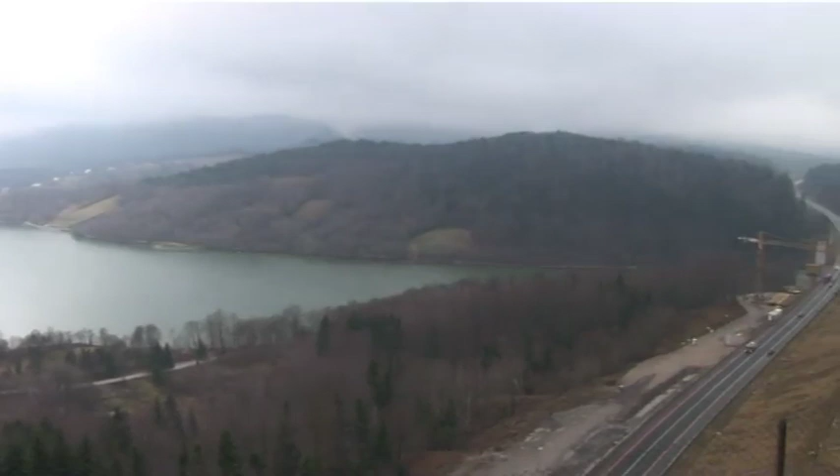Today, one of the main preconditions for the development of any country and its economy are fast, modern roads ensuring swift and safe transport of both people and thousands of tons of goods.

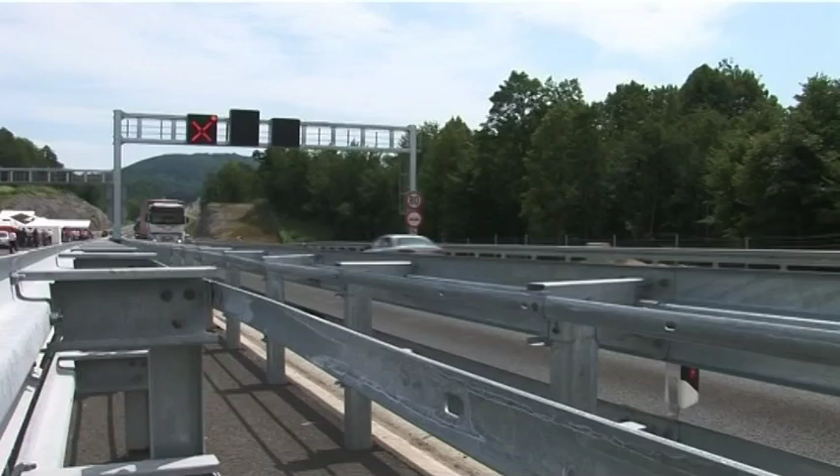Motorways have enabled the movement of people from continent to continent, serving to bring closer together different peoples and cultures, transforming journeys into occasional global migrations to desired tourist destinations.

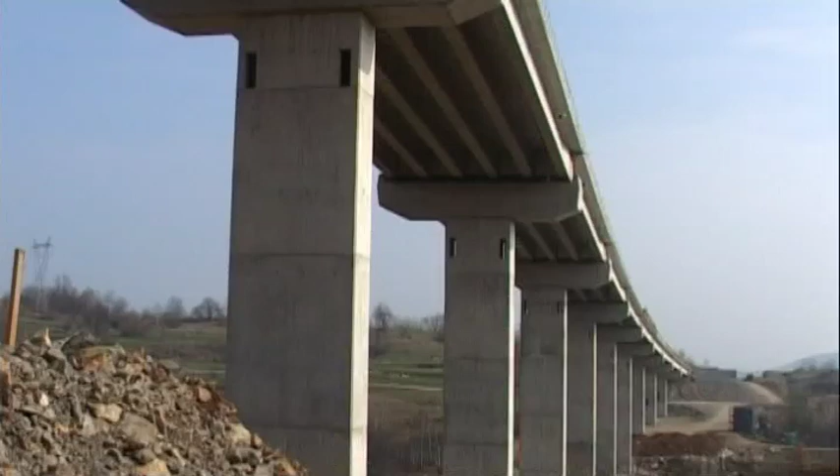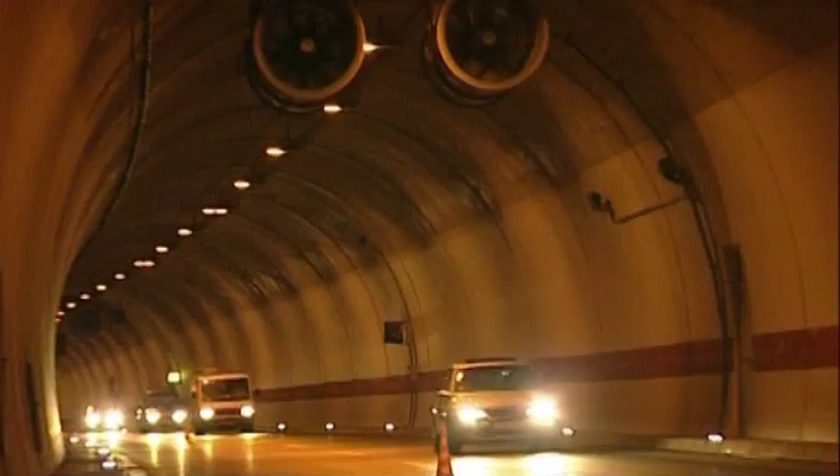Rushing towards our destinations through tunnels, across bridges and viaducts, we rarely consider the enormous efforts and knowledge the builders had to invest in order to build such structures. Crossing rivers and canyons, negotiating mountains have always posed a special challenge to road builders.

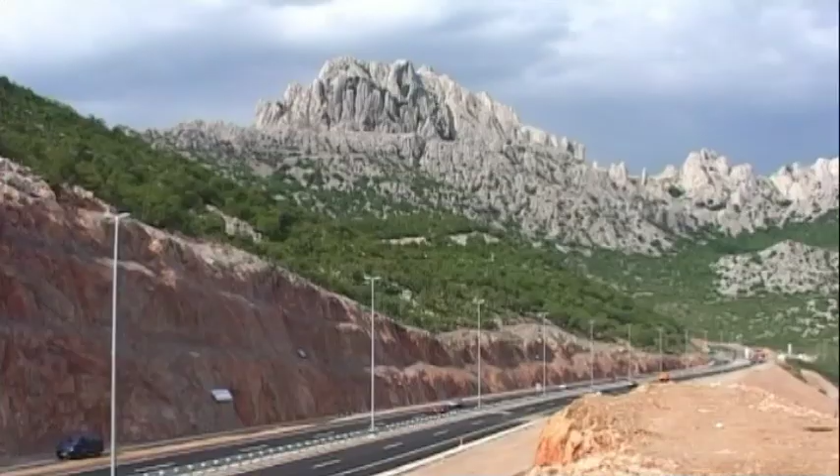And when roads run in the vicinity of protected areas or national parks, extra care is needed in order to protect the environment, which constitutes a still greater challenge to builders.

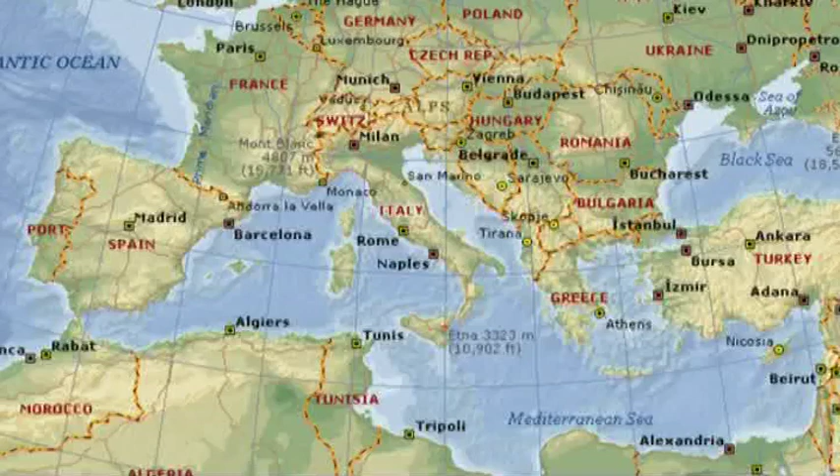Croatia extends through the karstic belt of the Mediterranean, which abounds in speleological features, caves and holes, as well as tens of kilometers of underground water courses.

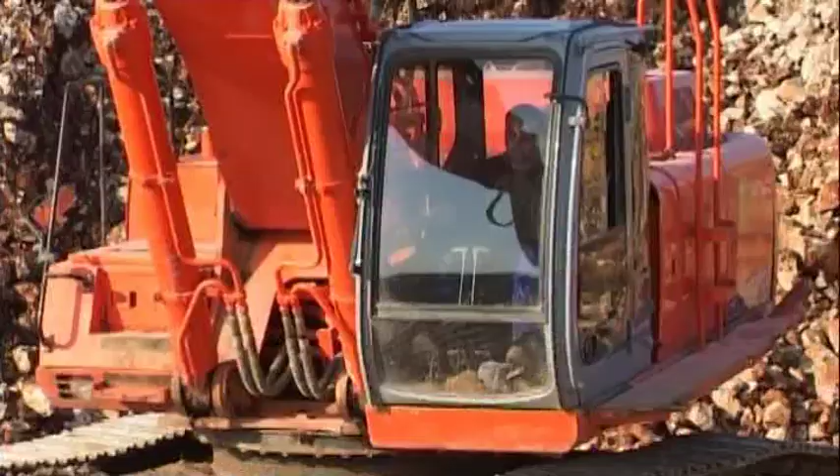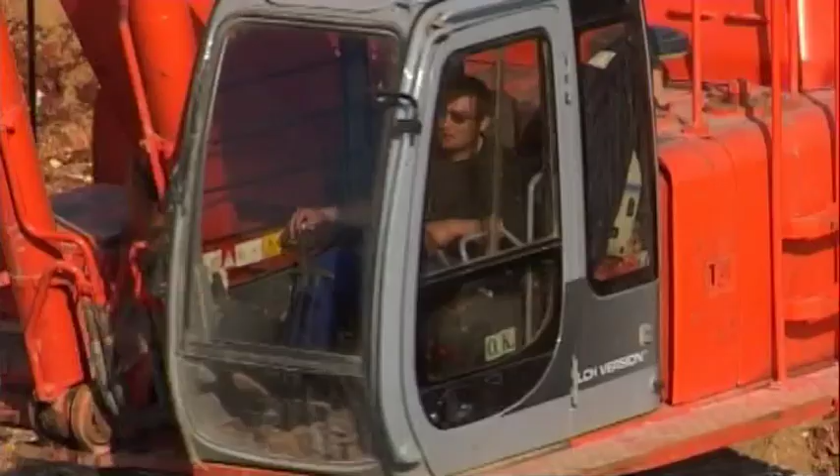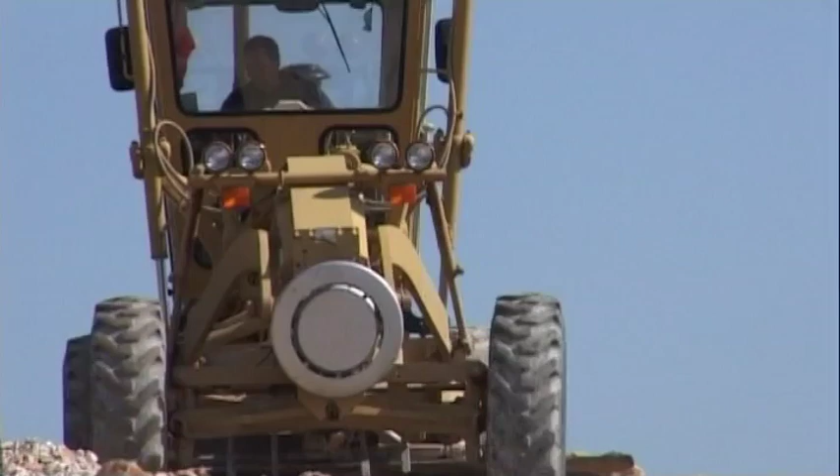Consequently, in the course of construction, numerous obstacles are encountered, including caverns, a speleological feature with no natural opening to the surface, the exploration of which must be carried out by speleologists.

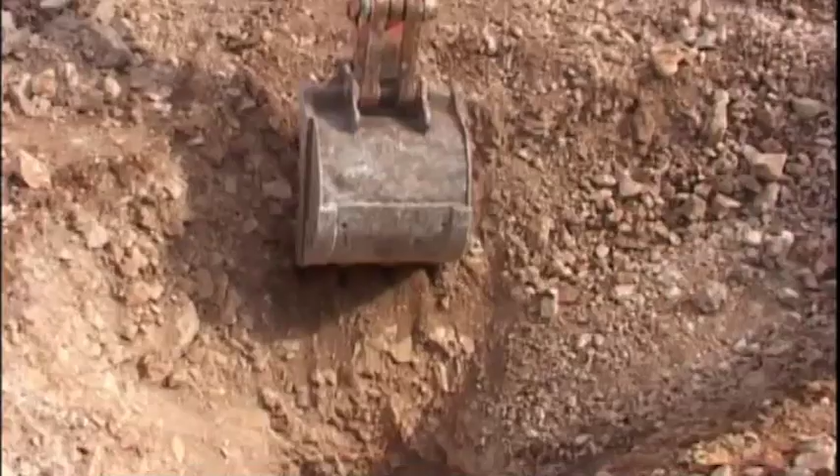According to Dr. Mladen Garasic, professor at the University of Zagreb and a speleologist with 40 years of experience, a good number of them devoted to the study of hundreds of caverns in karst, such caverns are by no means a rare occurrence. In contrast to holes and caves to which entrances are known and relatively safe, exploration of caverns requires special care, since construction work and blasting render the surface layer very unstable and can result in cave-ins.

Statistics tell us that we can expect at least 2 caverns for every kilometer of motorway through the Dinaric karst in Croatia. In about 400 kilometers of motorways, over 850 caverns have been discovered and explored. Fortunately, the most common features lie at an average depth of 25 to 50 meters.

The wealth of speleothems, for example dripstone formations, tells us of the genesis and the hydrogeological functions of a given facility. If at any time of the year there is water in a cavern, the aim is never to fill in the cavern, in order to ensure underground circulation and to prevent pollution of underground waters.

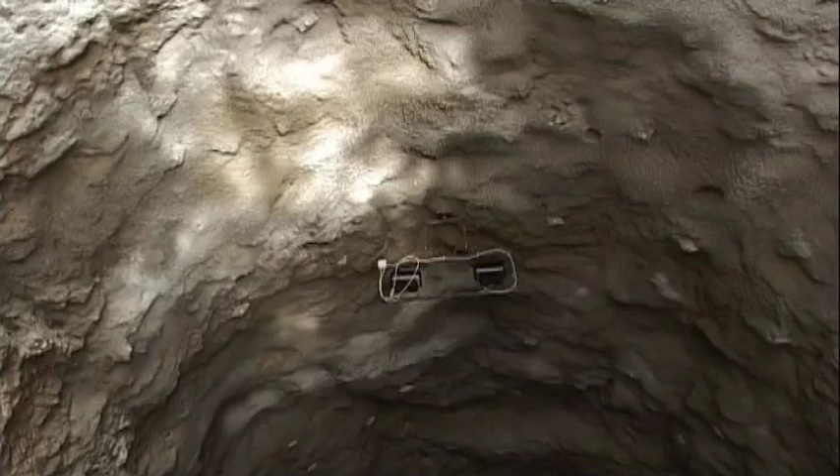The real problem facing project designers and builders alike arises when a tunnel is to be built. Even extensive exploration works cannot ensure positive detection of a cavern in a proposed tunnel.

Due to the depth of the surface overhead layer, which in the case of a tunnel can be more than 100 meters, much larger and more complex speleological features can be anticipated. In Croatia, there are several such examples in road tunnels over 5 kilometers in length.

Through a small and unobtrusive entrance, larger spaces were reached which extended backwards and beneath the already excavated tunnel.

Fortunately, it was not necessary to additionally stabilize the surrounding rocks, since the cavern descended steeply into the depths of the earth.

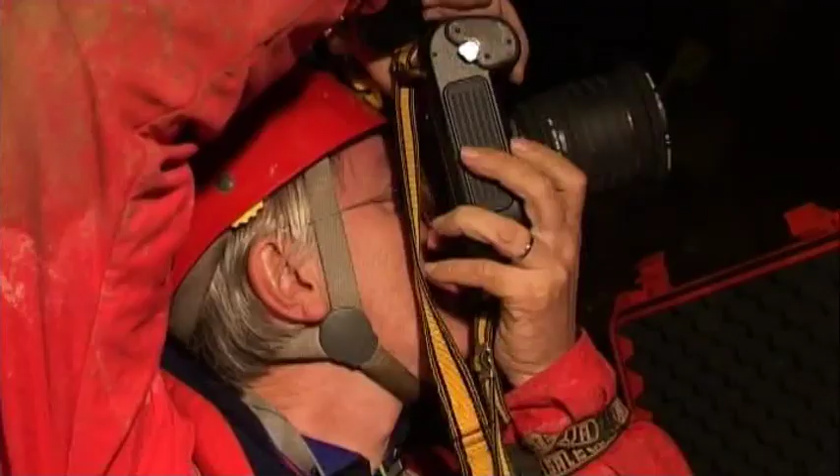In the same site, we found several interesting speleothems.

The hall in question is over 80 meters long and extends steeply and parallel with the tunnel, and through it flows an underground current a few hundred meters long.

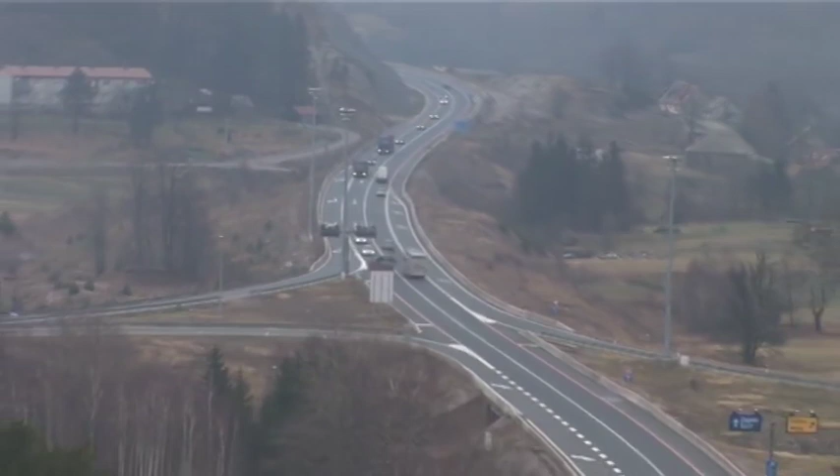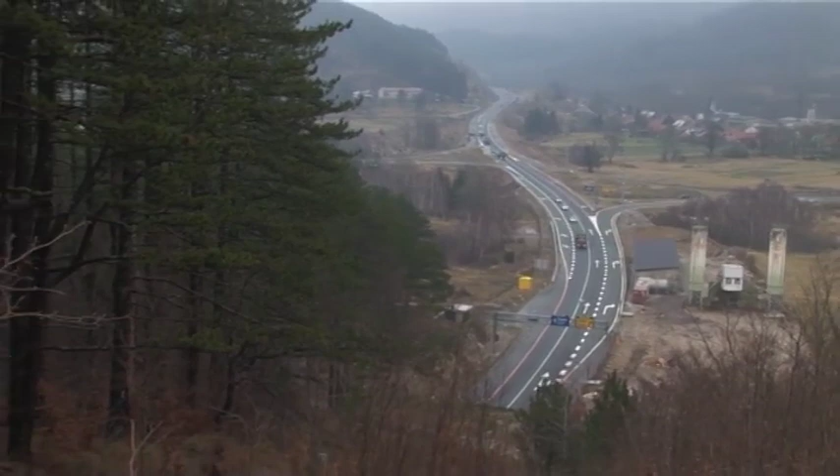But the greatest challenge for both project designers and builders was the construction of a relatively short tunnel of 250 meters with a thin overhead layer.

An additional complicating circumstance was the fact that the other duct of the tunnel is in function, with thousands of vehicles passing through it daily.

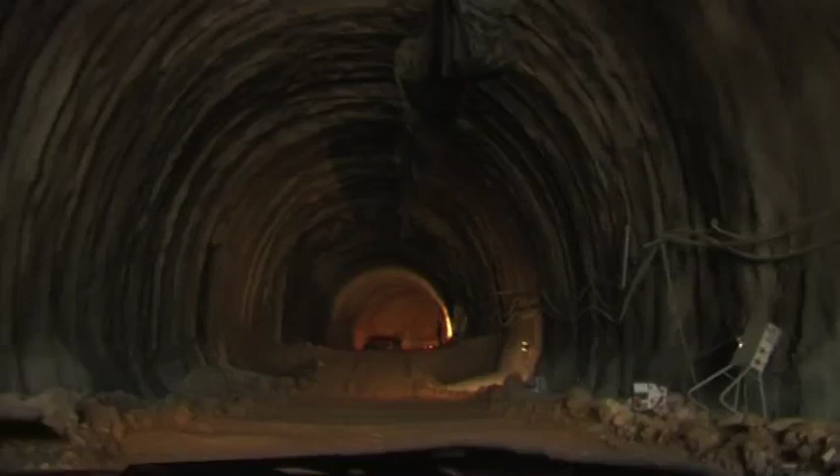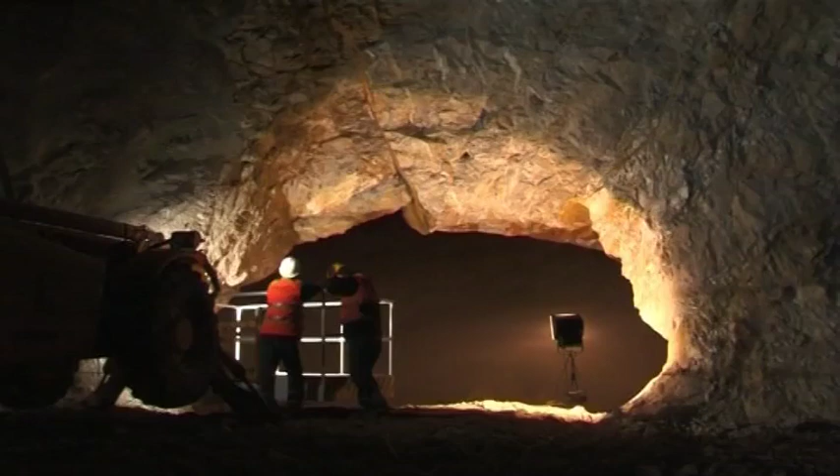As has happened so often before, Dr. Garasic and his team of speleologists were called upon to assist in exploration and documenting of the encountered cavern.

Experience to date, combined with the most superficial investigation, made it clear that the hall in question was very large indeed, and which was going to cause additional problems to both project designer and builders.

Our group of speleologists is preparing to enter the cavern.

The approach to the entrance is being cleared.

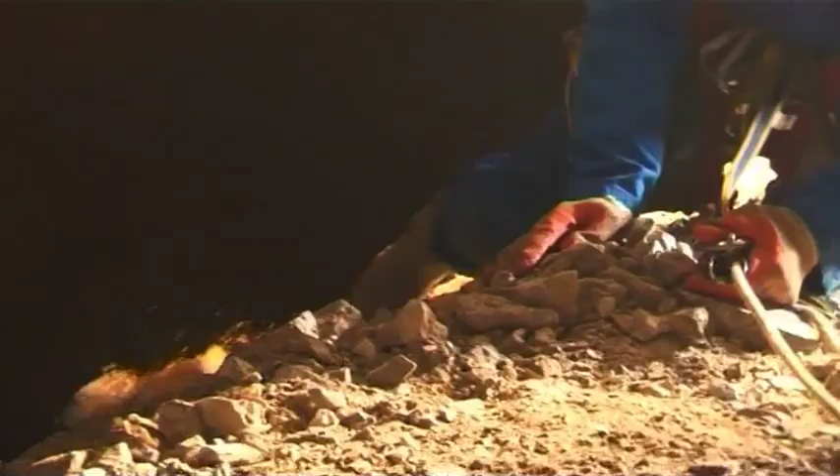Entry into the vertical and descent into the hall follows. We sense a large space around us, which our carbide lamps are unable to illuminate.

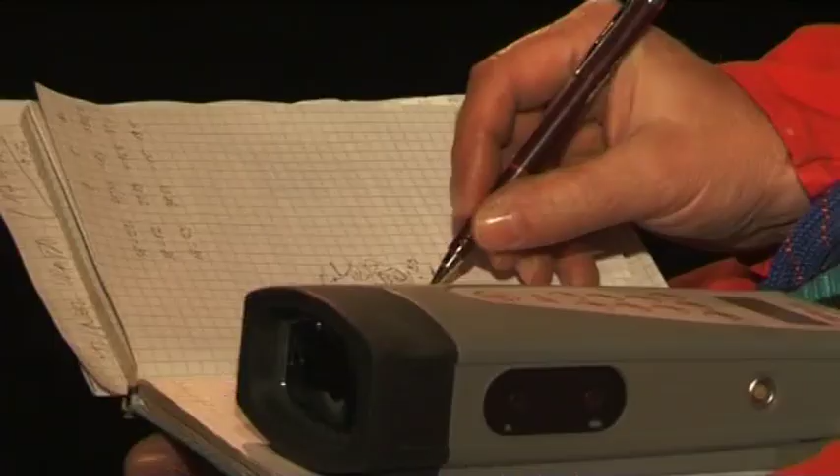Quite obviously, it is raining outside since water is seeping through the cracks into the hall. In addition to this hall, there is an active abyss a few hundred meters from the tunnel, which had been explored during the construction of the first duct of the tunnel, and which is possibly linked to the hall. However, our investigations tell us that the joining canal has caved in.

After 8 hours of measuring, we have an insight into the approximate size of the hall. In order to be able to document it as correctly as possible, we also produce photographs with characteristic details.

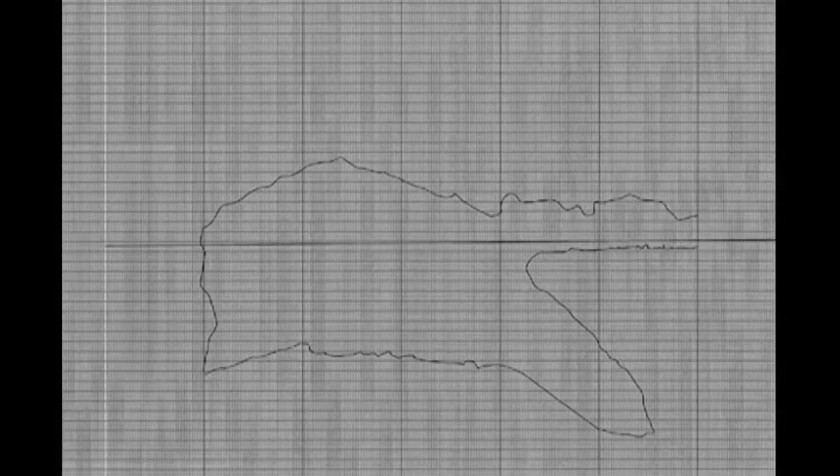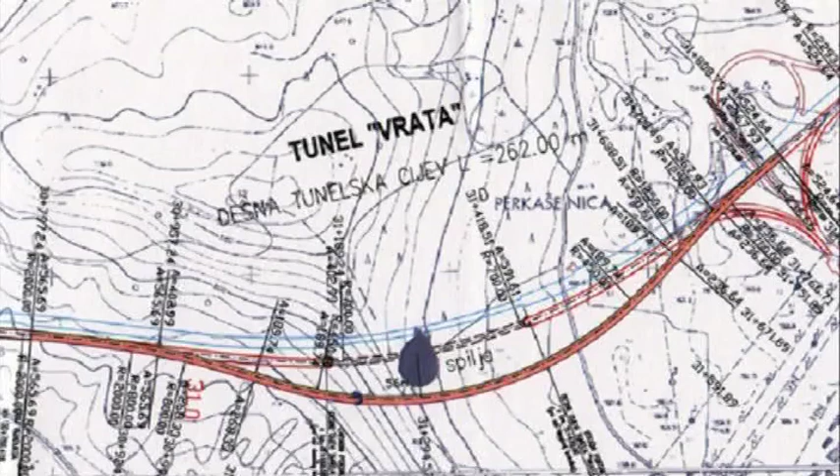The systematization of documentation and topographic measuring provide us with a map of the hall and its relationship toward the location of the already built and operational tunnel and the one under construction. The main hall of the cavern is over 80 meters long, over 60 meters wide, and more than 40 meters in height, and the tunnels run across its center by height and across 1/3 of its length. In order to span it, a bridge of about 55 meters long would be required.

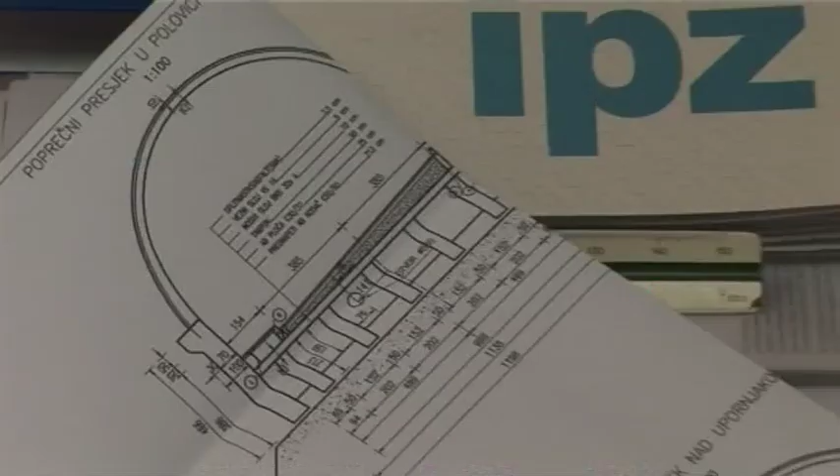It is becoming increasingly clear that the cooperation between the university and project designers can lead to a solution to complete the tunnel. A month later, when the entrance to the tunnel from the other side is opened, we return to the cavern. With the opening of the other entrance, the approach to the hall was somewhat easier.

Several alternative solutions have been offered for the completion of the construction of this part of the motorway. Some have even proposed the construction of a completely new tunnel, since they believe the cavern was unstable both in its ceiling and its floor.

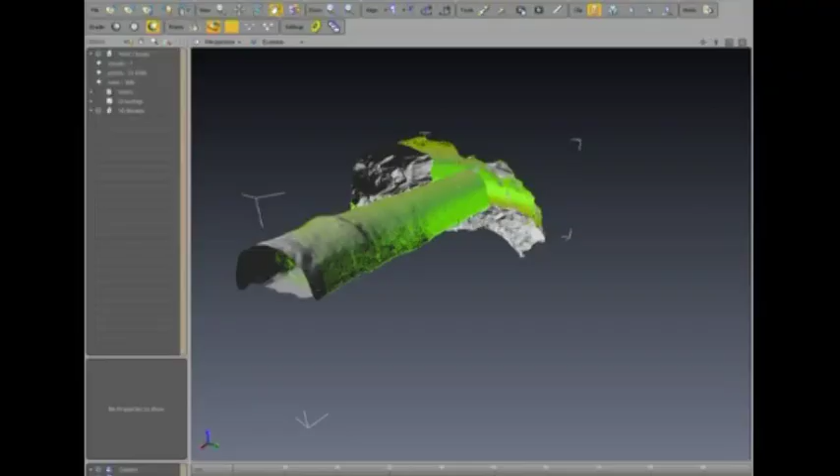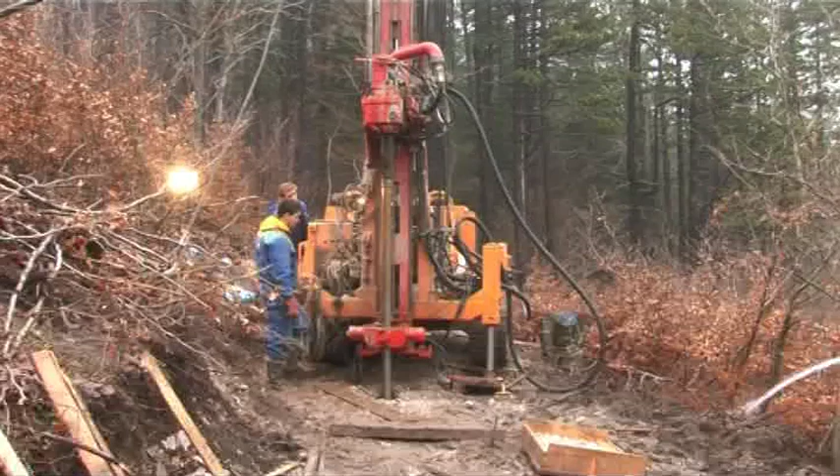It was necessary to produce a project for the stabilization of the cavern ceiling and assess the quality of rocks in the overhead layer of the tunnel. With that in mind, a 3D animation of the hall ceiling was produced, while boreholes were being sunk from the surface to the hall. Some 10 boreholes between 25 and 30 meters deep were sunk, and all were drilled directly to the cavern ceiling.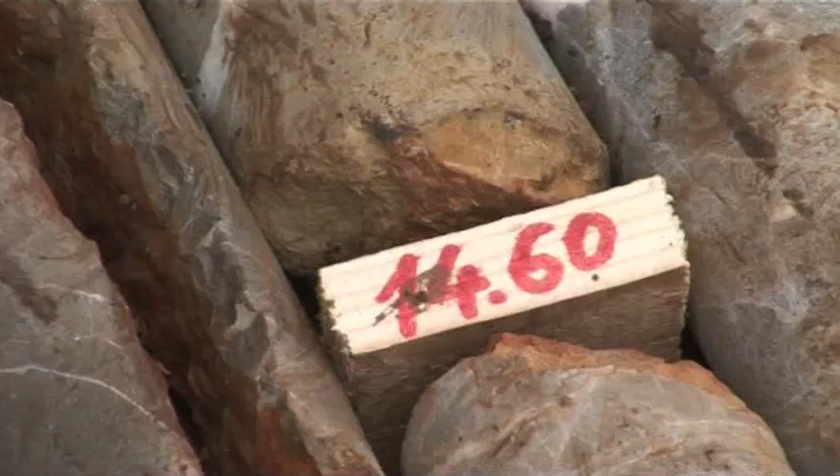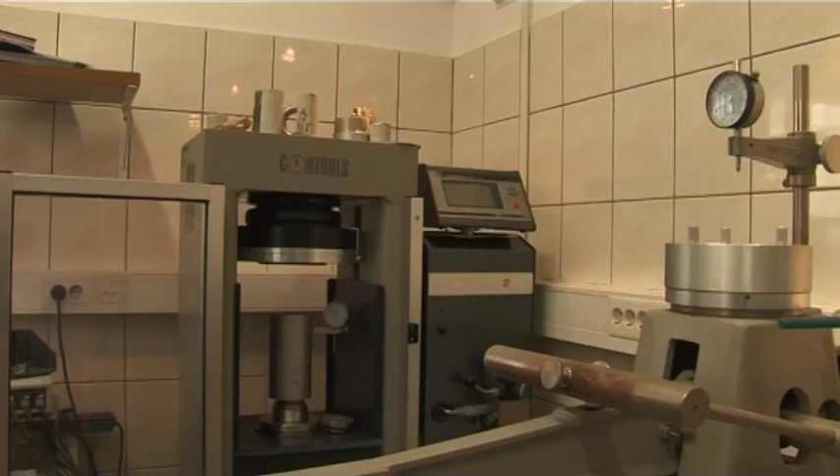Samples of bore cores were sent for analysis to the Faculty of Civil Engineering in Zagreb. The strength and the point of fracture of the rock, fissure systems, etc. had to be established, and in order to obtain the required data, all relevant analyses applied throughout the world were used. The result was data on the composition and quality of rocks forming the hall ceiling.

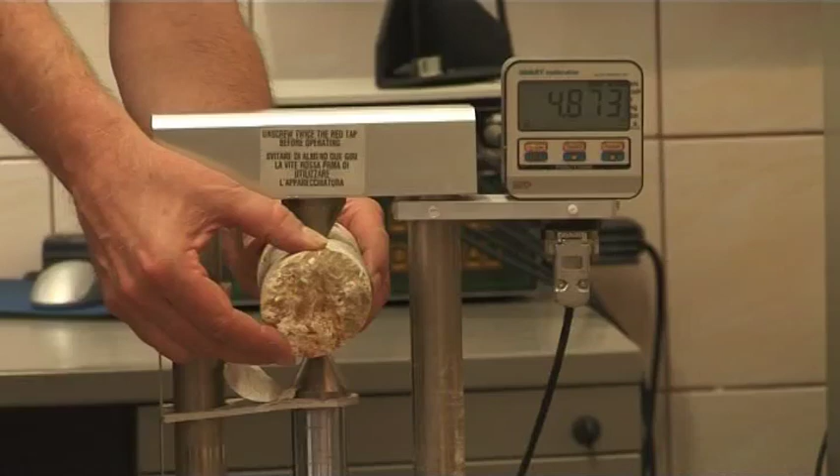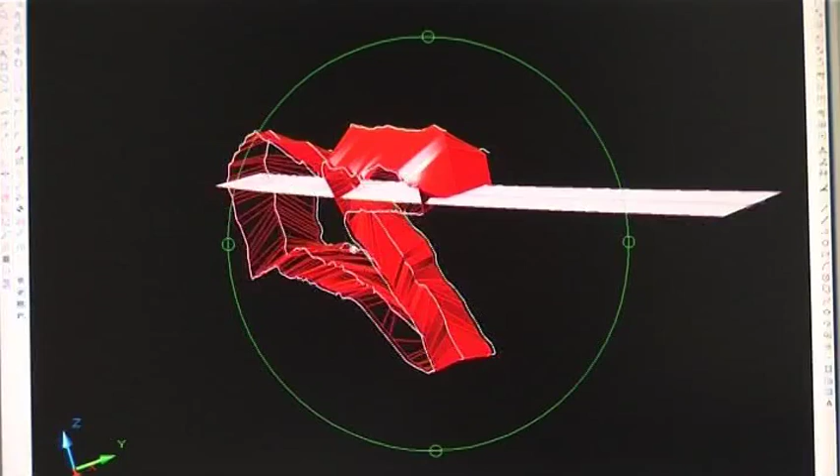Following exploratory and laboratory research, it was possible to begin production of the project and the construction method. The ensuing project involved strengthening the rock in the cavern ceiling by way of numerous anchors and a grid on the surface of the terrain which serves to ensure such strengthening and allows for the construction of bridge abutments in the tunnel to begin.

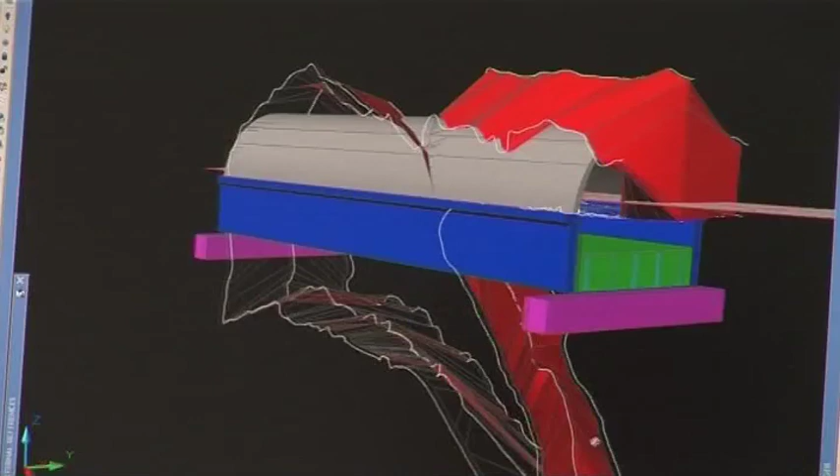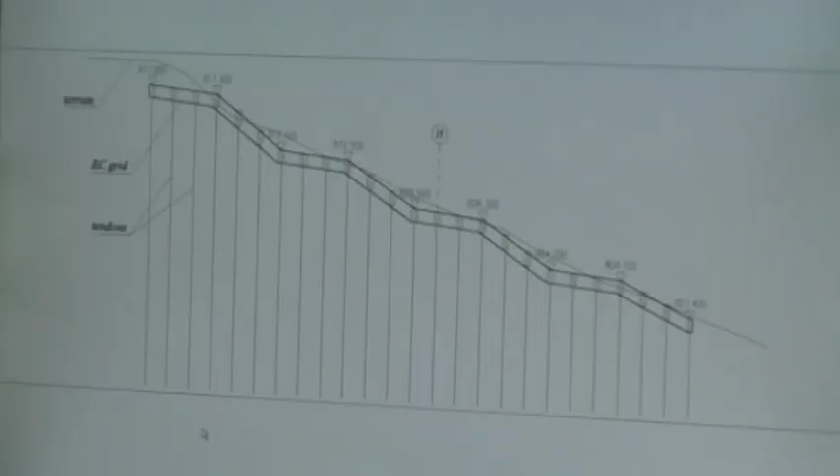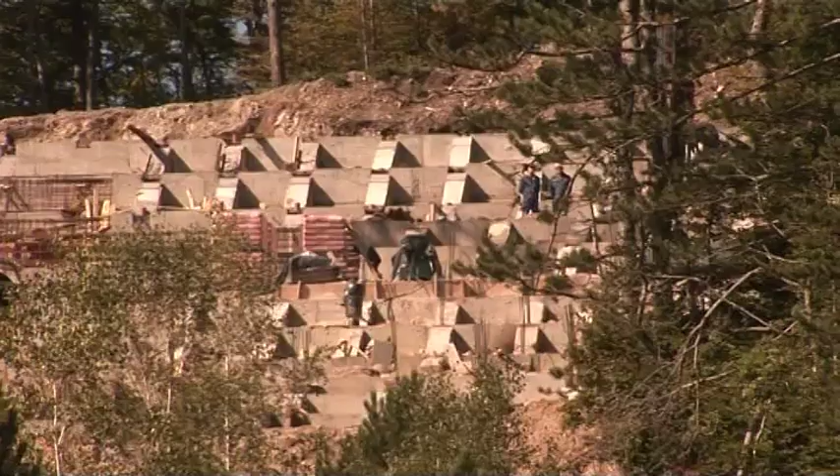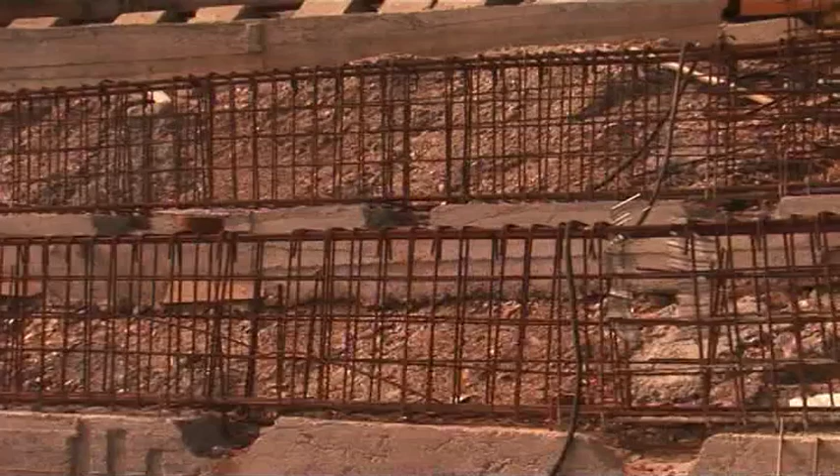After the bridge planning had come to an end, it was possible to conduct further building activities in the tunnel. In order to provide good and undisturbed conditions for the construction of both the tunnel and the bridge, it was necessary to develop a project which would ensure the stabilization of the cavern ceiling. The rocks were secured by anchors and a so-called grid, which was constructed into the terrain surface to provide good and undisturbed conditions for the construction of the tunnel and the bridge.

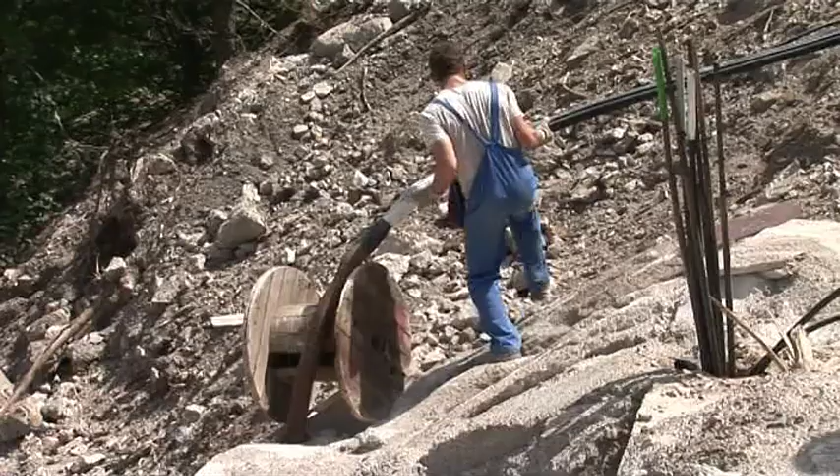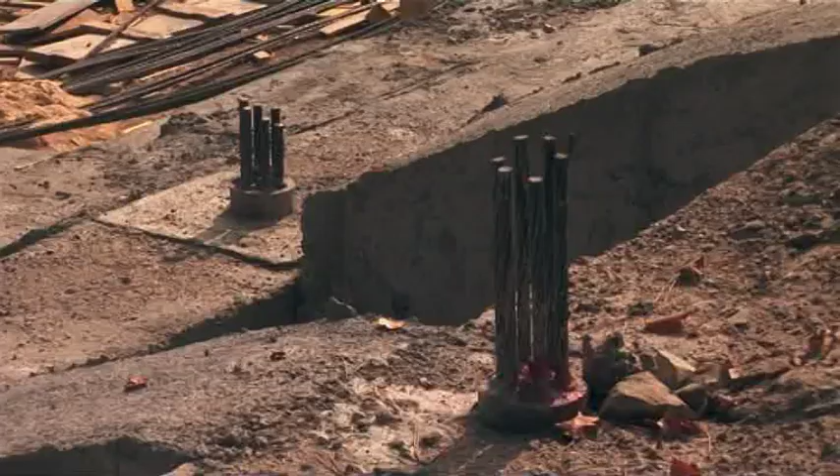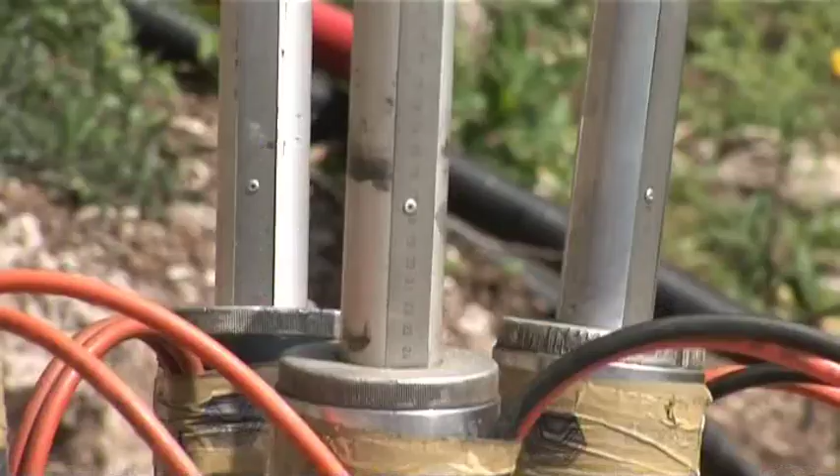Special steel anchors connect the concrete grid-like foundation on the terrain surface with the cavern ceiling and provide additional stability. The anchors were placed in the net-like formation and several hundreds of boreholes were drilled. At the same time, special instruments for measuring the changes of rock tension were placed in some boreholes. These measurements will also be conducted in the extended period after the road is open for traffic.

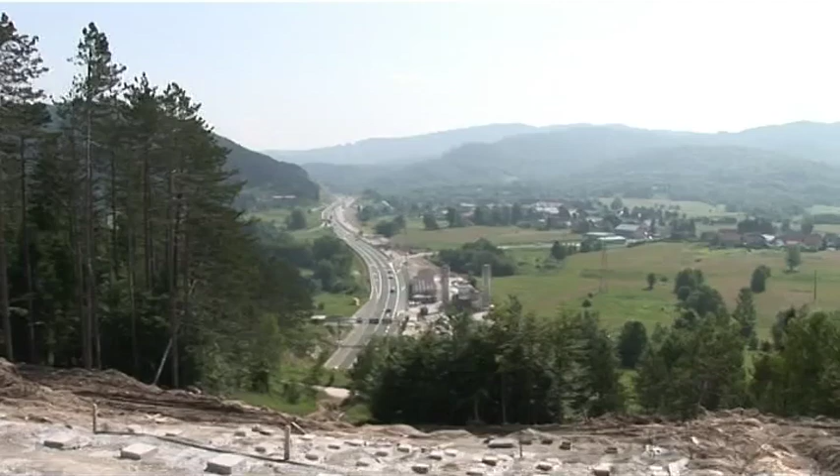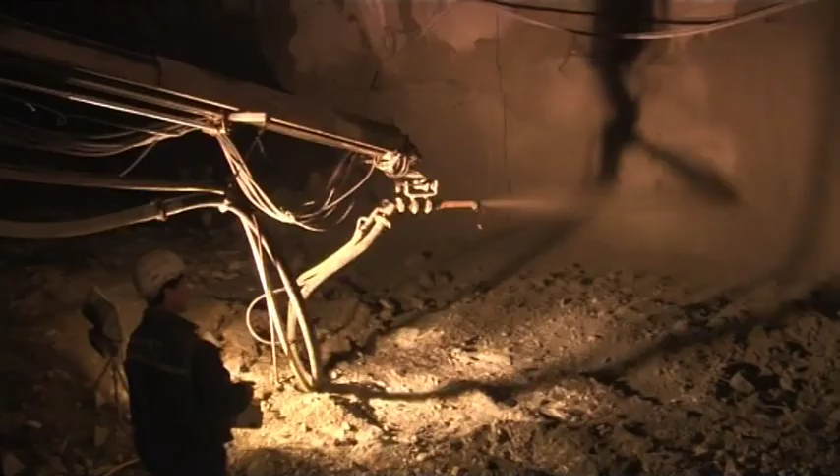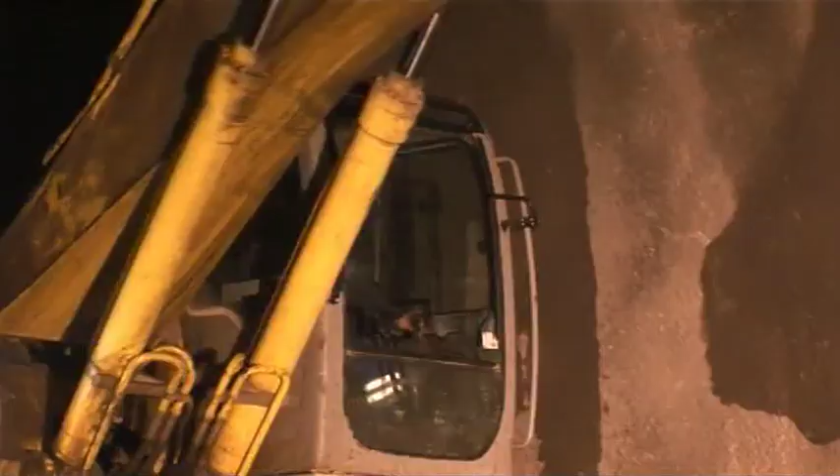After the cavern ceiling was stabilized with the anchors and the special concrete mass was injected, it was possible to start the construction of bridge supporters in the tunnel. First, the additional embankment was built in the cavern to facilitate the access of the construction machines. After these initial preparations, the setup of bridge supporters was initialized on both sides of the tunnel. At that moment, it was possible to begin with the construction of the bridge.

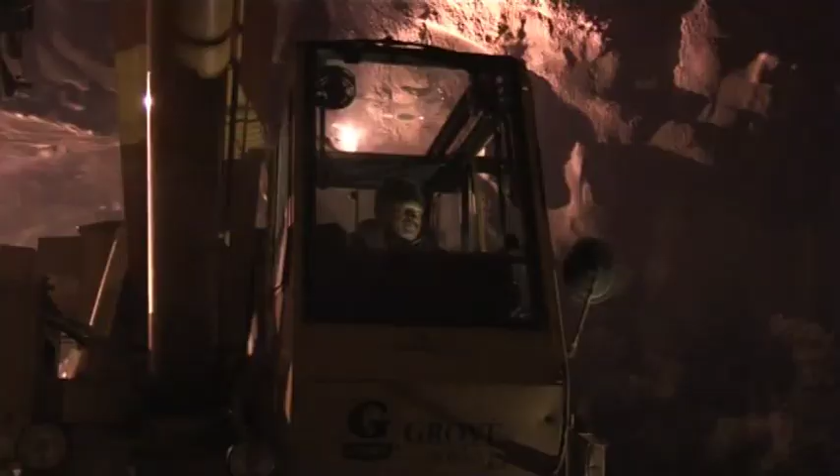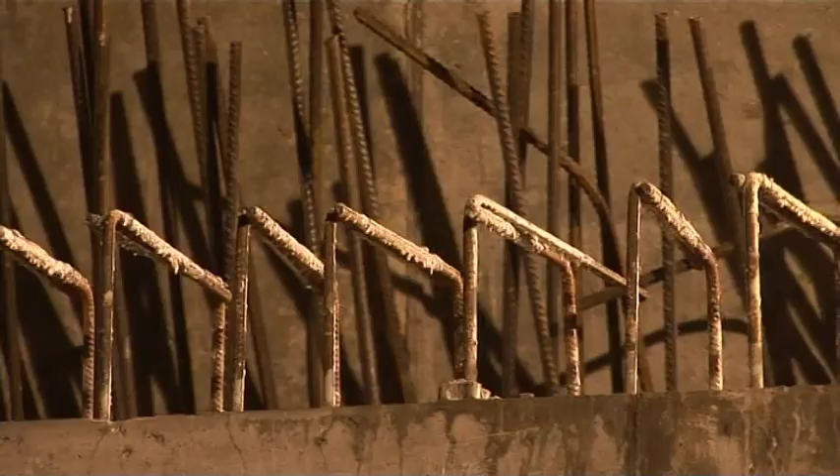Since it was possible for the construction machines to work only within a limited space, the construction was divided into several phases. The sides of the bridge were constructed one by one, after which the concrete tunnel plate was constructed over it. The construction of the bridge was finished in about 1 year.

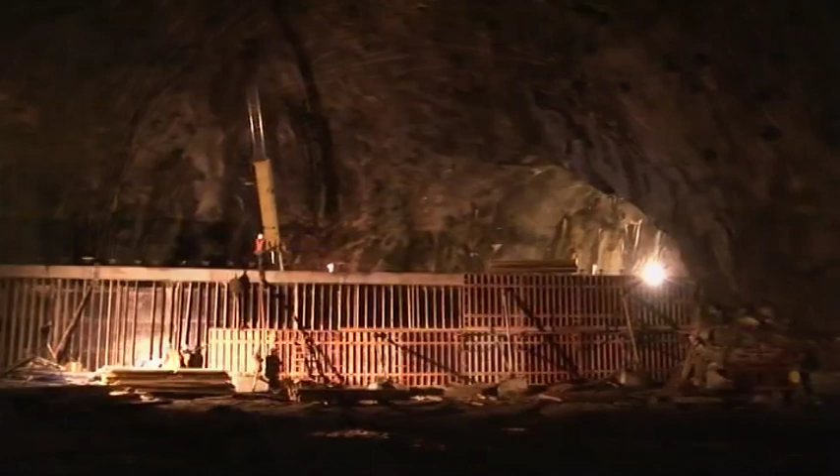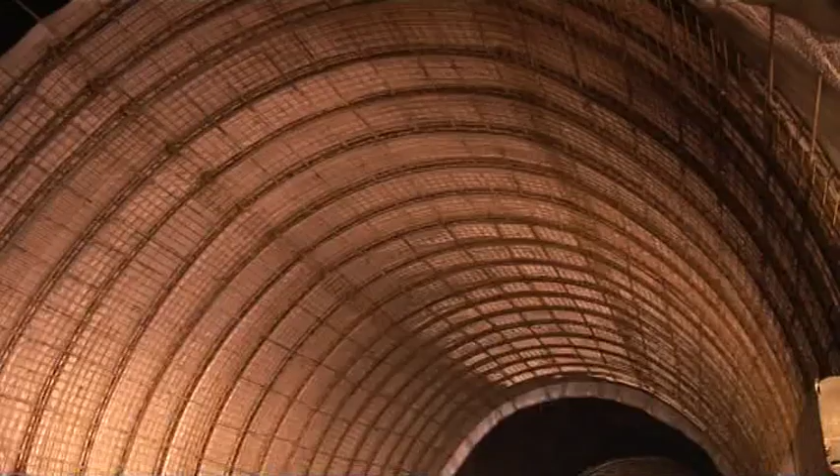The whole project of the construction of the bridge in the tunnel, in which the renowned experts from the fields of speleology, hydrogeology, tunnel construction, rock mechanics, geotechnics and civil engineering were involved, took almost 2 years. The tunnel with the longest bridge in the world was open for traffic at the end of October 2008.